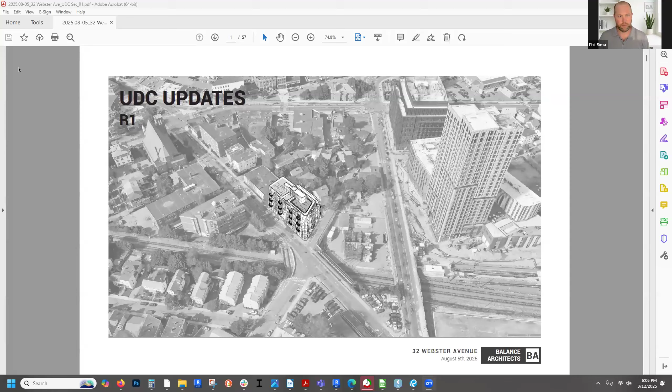Well, thanks everyone. So we got some great feedback from our last meeting, and we came up with some other facade iterations. I'm not going to go through the old options that we had, but I will just kind of land on the last option, which was the one that the UDC asked us to explore. And then we'll go through landscape plans and architectural site plan updates as well.

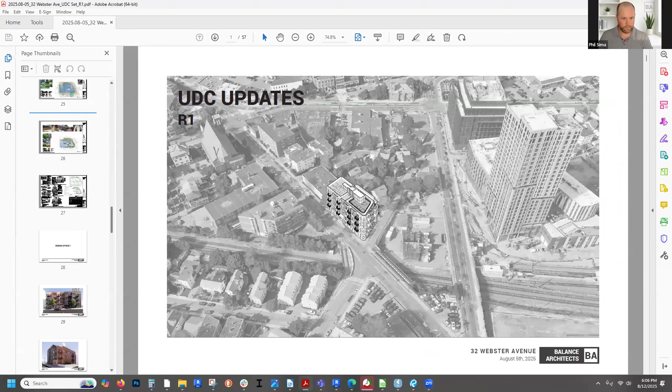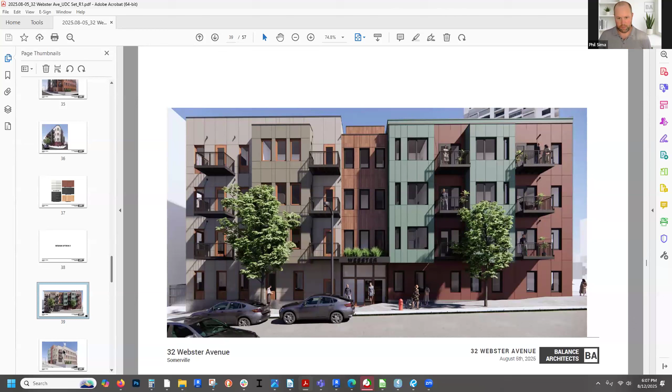So out of our 3 options that we looked at a couple of weeks ago, this was the one that we landed on. It's a mix of fiber cement panels and then a phenolic resin panel in the middle where the entrance on the building is on Webster. Again, it's a very long building, so we're trying to break up the massing of the facade. Generally, we got good feedback with this scheme on Webster. Again, this is facing the rear yard here.

I think there was generally positive feedback, but where we needed some work was this corner of Webster and Newton, and that it just wasn't really doing justice to this really unique geometry on the site where everything's kind of sloping away, and this is coming right into the middle. We felt we should do more to celebrate this facade and make it unique at the corner.

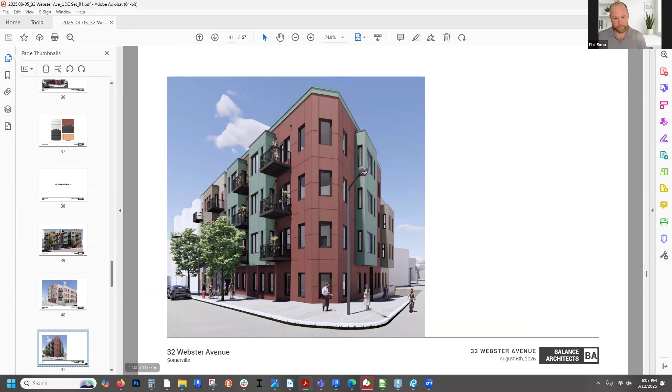So with that in mind, we came up with several design options and iterations of this. The first basically creates balconies on the corner and uses soffitted balconies with angles using that same material to create some really interesting, rugged geometry at the point of this building. You really see it here. So quite a bit different from what we were looking at before, and some really nice outdoor space for those units on the corner.

And then you can see how this looks on the side. Again, it's kind of this nice piercing geometry that accentuates the corner. So that's option one, and I think our favorite from the options.

We came up with another more muted option, but still really celebrates that corner. So what we've done is introduce some Juliet balconies over here. So you can see this from here. It just really pops the fenestration, makes it much more light and bright on that corner.

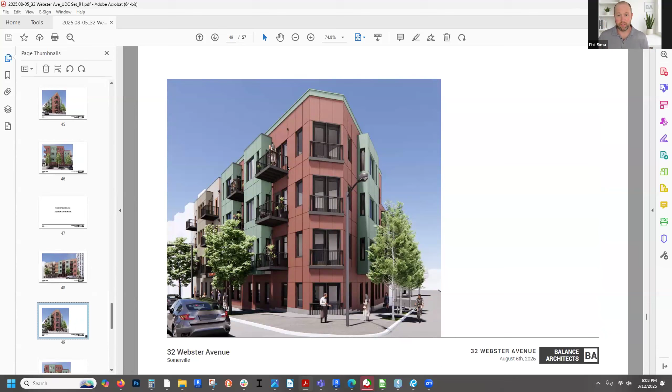And again, add some nice amenity space. They still have full balconies in these units. They also have the ability to really open up onto the street. So that's what we're looking at here as well, kind of that chamfered edge.

And then our third design option really looked at changing the material and fenestration patterns on that corner. So it's varying between this kind of olive color, where the windows are and where this is, and that jogs up and down throughout the entire facade.

And then we've also introduced a stronger cornice up here. That was something that was a comment as well, to kind of give some pronunciation to this edge. You can see what this feels like on the corner as well.

There were some considerations too about this red material and where it ended before it kind of stopped short of the 4-story massing. Now we've taken that and it carries around. This bay is now the same material type as before. It was kind of tan. This tan material was coming along here.

And also looking at fencing, so we have a couple options along here. We've removed the pad-mounted transformer and now making it a manhole transformer, which Michael and myself will talk about in the landscape updates. But looking at a panelized metal facade, I think this is from Parasoleil, versus just a contemporary wooden fence with really long horizontal edges that link back to some of the materials in the building. So those are the fence options and the general treatment of the rear.

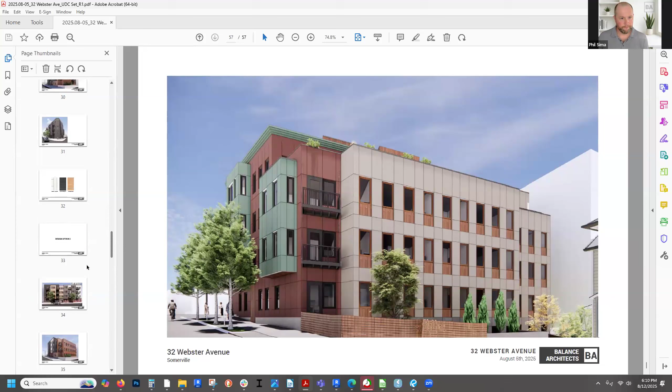Just going to quickly go to the architectural site plan updates, and then we can do landscape updates as well. So the big one was that we were really struggling to get the pad-mounted transformer in there and to screen it, and I know neighbors don't really like that, so that was a big move that we did to make this a manhole transformer.

We had some small vegetation options at the front, really with that 12-foot wide sidewalk setback and the limited green space, plus the harshness of this corner, that just wasn't really a viable option at the end of the day. So architecturally, here we've coordinated more with the landscape, which I'll have Michael review right now.

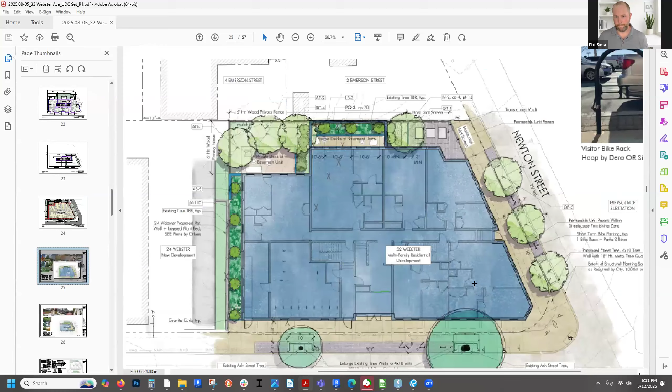Piggybacking off of what Phil said, with our landscape, the two main changes to the site plan were the transformer as well as the plant bed that we had originally at the corner of Webster and Newton Street. We removed that, as Phil mentioned, the setback. And when we're looking at a corner, our main goal is to have it walkable and accessible. It felt like that was getting in the way of both sightlines and walkability.

Moving up to the transformer pad, as Phil mentioned, we had trouble fitting in the pad mounted transformer, so we moved to a transformer vault. Around that, we want to add some permeable paving. Another comment we had received earlier on was that the fence we had originally around it was a little too traditional, so we were looking at some sort of 6-foot height horizontal slat fence or some sort of metal fence from Parasoleil. So those would be the two main changes to the landscape plan.

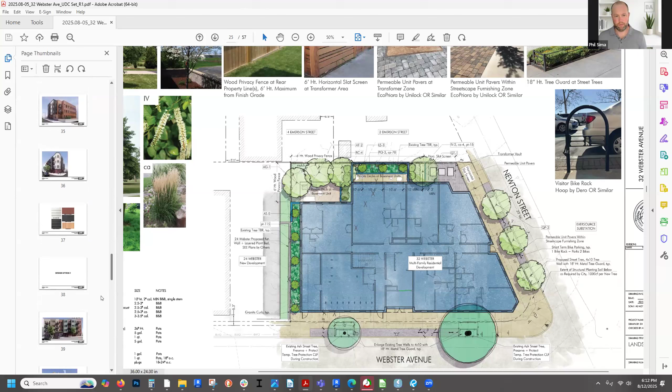And that's pretty much all that we have for the presentation. So I'll just leave it on this last design option and open it up for comments.

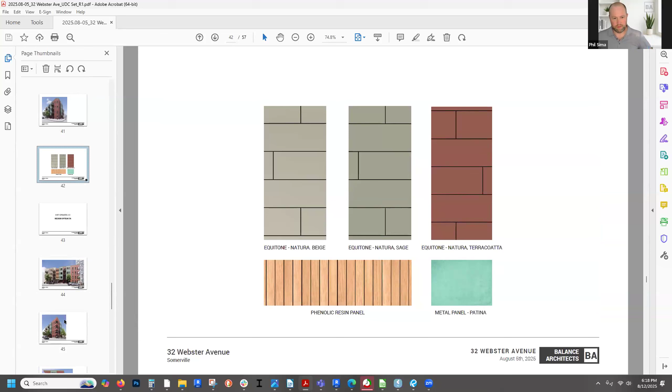Ideally not. Okay, all right, but that's good. Ideally not, no, that's fine. I'm just asking the questions.

I mean, the expression of it really just creates more of a corner. I think people would really want to hang out in a corner, and I think it would be used better than a Juliet balcony. So I really do think this is a good approach to it. I do like the accentuation of the corner by doing this.

Thanks, I agree, I like the architecture of it. There's a dynamic quality to it. It provides a level of interest at that corner, which I think is really nice.

What's happening at the ground floor there? The grade is sloping up towards the corner, and then there's that second floor balcony sticking out. It looks like it's a relatively low clearance under that.

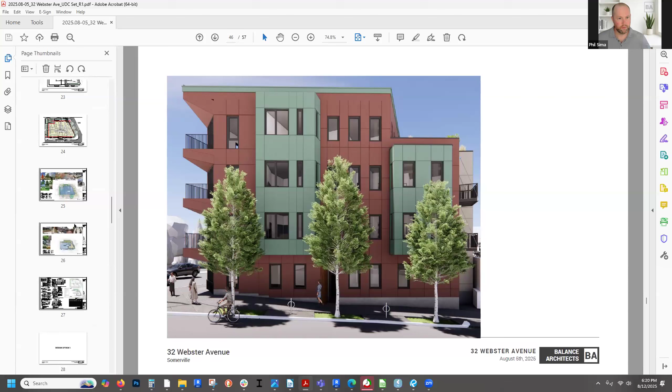Typically Somerville wouldn't allow you to do that when it's over the property line. But we are not over the property line here, all that is within our property. So basically our property is this kind of hatched area, it just extends out to there.

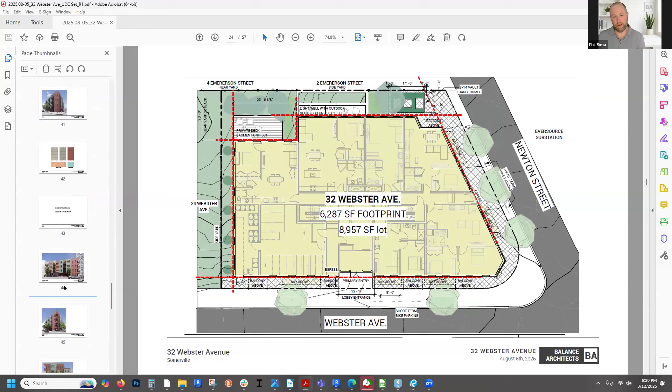We haven't had another conversation with ISD or staff after our last one. We think it's still consistent with the zoning ordinance, but there might come a point when they tell us it has to start from the third floor. But right now, it's all within our property.

So can you walk under that balcony? Does the sidewalk extend underneath the second floor balcony? Yeah, the same paving material, essentially the sidewalk, but it's on our property. And approximately, what's that clearance?

It's pretty low. It looks about 11 feet to the peak or something. I think it looks less. Looks like 6 or 7 to me. Well, this guy, I mean, he's got some feet in the sidewalk, but I don't know.

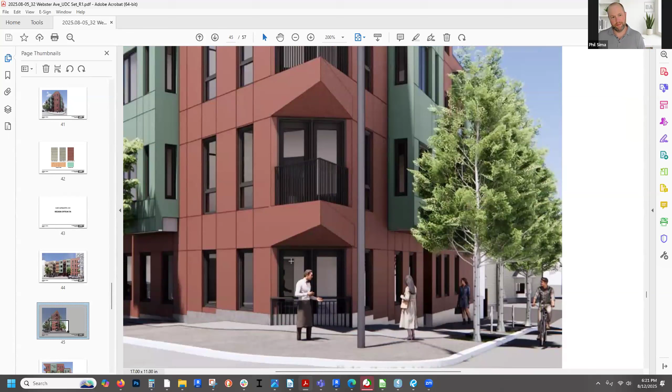I don't have that measurement right now, but I think that'll be something important to confirm. If it's overhanging the public realm, I don't know exactly what the zoning ordinance requires for bays that overhang the property line.

I know code has a requirement for that too. I think it probably wants to be at least, think of the height of someone standing up on a bike or something, right, 9, 10 feet. Yeah, we can confirm that.

I'm not sure, if you did end up losing that because there wasn't proper clearance, I'm not sure it changes the approach. I think it's still dynamic and interesting architecture, even without the second floor balcony.

It seems like you have a lot of meat there, perhaps, Tim, and maybe it doesn't need to be the Angry Birds kind of beak on that floor. Maybe it changes the aesthetic, but you could still have potentially a balcony without all of that dead space inside. I know what you're trying to achieve, but it's nice to have the consistency, so maybe there's the idea of exploring it a little different so you still maintain that.

Or maybe that outer edge gets even thinner, where it comes to a point, once you get into real structural design.

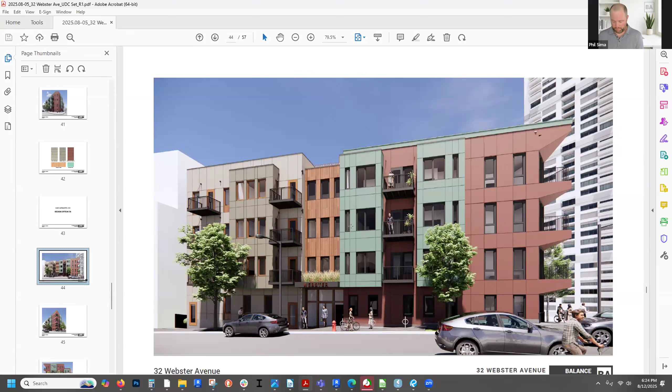So I agree with my colleagues about, and you, Phil, about the preferred. I think there's no corner like that in Somerville, as far as I know, so it has a unique identity.

I wonder, so the ground floor of that corner is residential, correct? Oh yeah, whole building is residential. I'm wondering if it's not treated differently in terms of the fence, which right now is also sinking in the concrete, and maybe that one is not a door, that feels like a vulnerable place for a door.

I don't know, it might be the only unit that does have an exterior entry. Is that true? Are there other ground floor units that have one? It just feels like too prominent a corner to have a door there going into a unit. So I feel like maybe there's another landscape solution. You do have to keep people from hitting their head, but maybe there's something else that defines that corner, keeps people off of it, gives that unit some protection. But it's not the same thing you have on the upper floors.

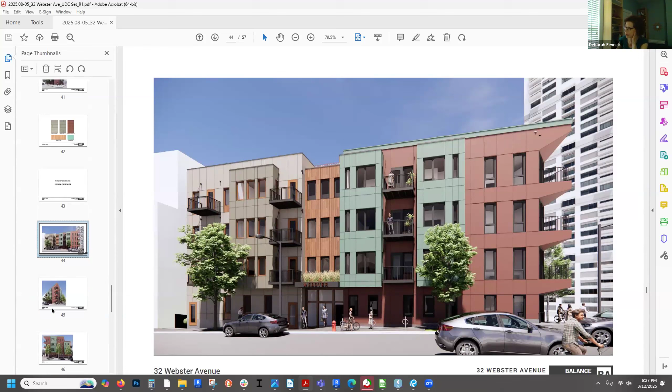There's a condition kind of kitty corner to this site, a building built probably 8 or 9 years ago, that has a condition where the street slopes up to the corner. There are windows that get very short, into a retail space, and it's kind of weird on the corner because they have such a small, diminutive scale at the ground floor while all the upper floor windows are bigger. I guess there's the possibility of that happening here as well, because it looks like the windows at the ground level are smaller than the upper floor windows- yeah, on the corner they are.

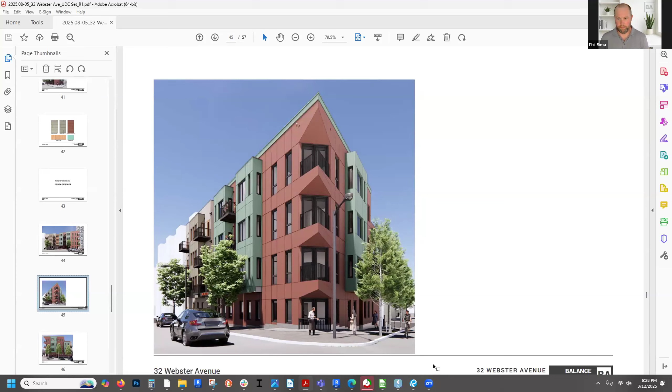Great, any other comments before we move to a vote?

So it sounds to me like we're ready to at least vote on the first option and approve the facade. Next would be the design guidelines for the MR4 district, and then last is the additional design guidance to these recommendations we've been talking about.

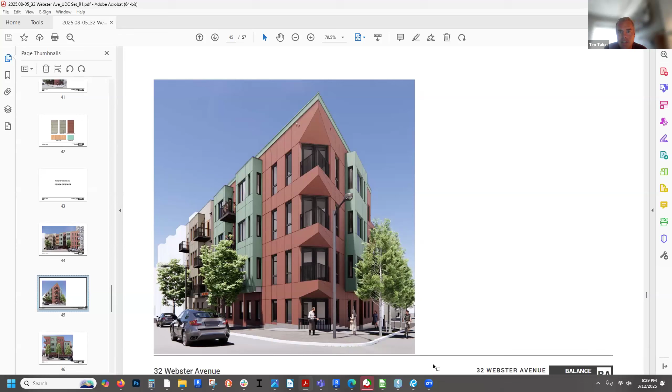I've just got two more comments. One, it looks in this image like the fiber cement panels aren't coming all the way down to the sidewalk, that there's some type of water table there, a stone base or something like that- is that correct? Correct, yeah.

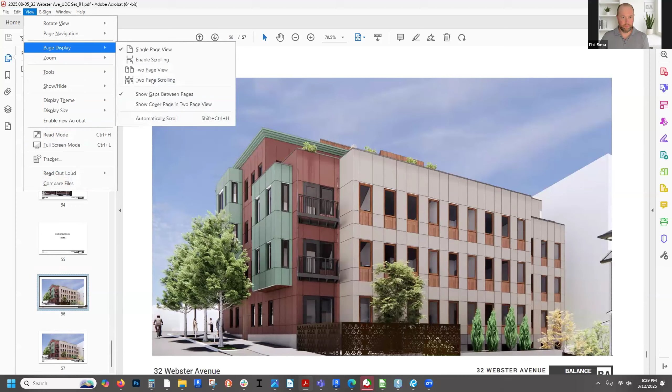And then also just the fence options that you showed- if we can go to that, let me see if I can do side by side. Not really, but good enough.

So I guess with the transformer going underground into a vault, does the fence still need to be 6 feet tall? No, actually you could. I'm thinking about the perceived height of that next to the adjacent property as the street slopes away. I'm wondering what that actual change in height from the top of the fence to that property is, and maybe there's a way to bring the fence down and have it be a little more diminutive.

Yeah, certainly. I mean, we could definitely do it to the first floor kind of foundation too. That would be a nice datum point and lower it. Looks like 18 inches or so.

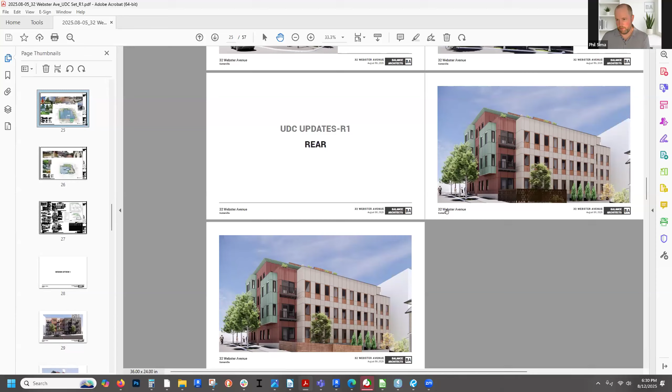Yeah, I guess what actually is it enclosing then? Is it just landscaping? Yeah, it's just a fence to kind of keep people from going into there. That's it. It comes straight off the building here.

And those pavers, are those at a different elevation than sidewalk level? They're at just about the same elevation as sidewalk level. I know that the transformer needs to be at a level height, so they'll slope a little bit with the sidewalk until they're at the transformer.

Yeah, it would be nice, I don't know what the solution is here, but maybe this is an area that the landscape design could be studied a little more, because it feels a bit like a lost space if it's just fenced off and inaccessible.

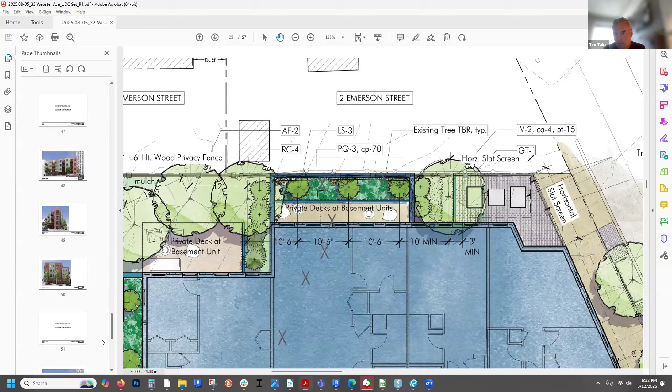And any more comments from the commission? Doesn't look like it. So it seems like we are ready to vote on the facade, and it seems like the commission was leaning towards the first option. So can I get a motion to approve option A, that creates the sort of corners of the building?

So moved. Second. Thank you. Motion by Deborah, second by Frank, and now a roll call vote. Deborah, yes. Tim, yes. Frank, yes. And Martin, yes. Great, the motion passes.

And next we will vote on design guidelines, that those have been met for the MR4 district. Can I get a motion for this? Motion. Thank you, Frank. And a second. Second. Thank you, Martin. And now a roll call vote. Deborah, yes. Tim, yes. Frank, yes. Martin, yes. Great, and so this motion also passes.

And last but not least is the motion for additional design guidance to the recommendations, which includes: one, confirming the feasibility of an above ground transformer and confirming that with Eversource; feasibility of a below ground manhole transformer; and then reviewing and confirming the height of the overhanging bays, the treatment color of the cornice, defining the ground unit, and lastly defining the fence options and that space around the transformer.

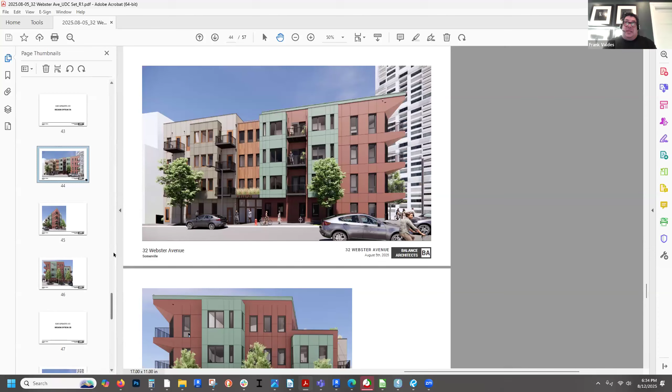I would add providing an alternate to the transformer being above ground in case a manhole is rejected by Eversource. So it would be good to have that to look at. Great, by alternate, are you suggesting an indoor vault? Just working out what that would mean for the building. Right, I mean we would need to know what the option would be if Eversource at some point says no, we don't want a manhole. What would be the alternate? So it's either outside somewhere, like it was presented before.

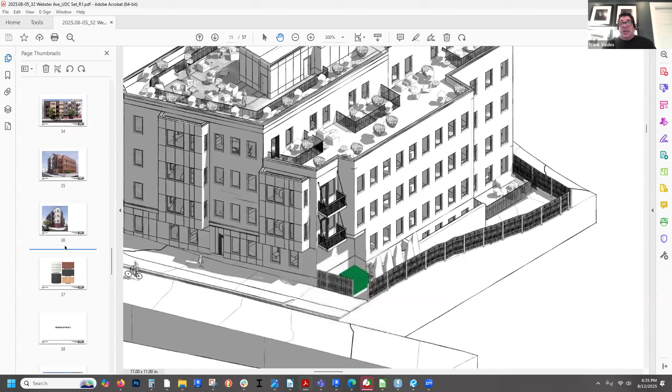I don't think that you can put it in, but you could do an alcove or a vault. But I think there needs to be, we need to see an alternative, right Tim? Not just, oh I don't know what happened, this is where I put it. Yeah, unless there is confirmation from Eversource that they're comfortable with it. Yes, agree. But that needs to just, that makes sense. And I'd say, either an acceptable outdoor alternative or...

What we're saying, I think, is that we are approving a manhole transformer, and if that does not get approved by Eversource, we would like to review the option as to where it's being put. Great, does that sound fair, Tim? Yeah, I think so. All right, and quick question.

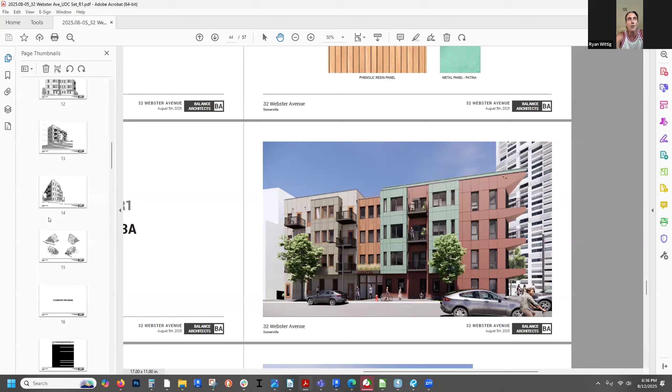Hi, this is Ryan Wittig, I'm representing the ownership group. We had previously presented the pad mounted transformer in our first presentation. Phil might have that, so we can revert back to show it was in our first round of design proposals. The reason we put it as an underground manhole transformer was in response to community - I don't want to say demands, but strong requests - so we were trying to cater to the feedback we got from JT Scott and some of the neighbors. And now obviously we hear your concerns, and we voiced those concerns as well originally. So I don't know if Phil has the original proposal we first presented. That wouldn't change, so we can show that now.

No, I think we appreciate the effort that you went through to locate it below grade, and the desire to do that. That is a better solution for sure.

I think what Frank's voicing is a concern that if it turns out that's simply not feasible, is there a third alternative that hasn't been explored yet? Either modifications to the building design to address the neighborhood's concerns about proximity of the transformer to the public realm and neighbors, or putting it in an indoor vault, as is relatively typical.

If you're familiar with the Union Square project around Bow Street going into the market basket, we approved a particular area for the transformer, and then it was moved in front of the building because of a request from Eversource, which wasn't what we approved. Nobody said anything, and then everybody's screaming about it. So it's about creating more open communication with Eversource on what's acceptable, so everybody's happy with it, because that's why the community's probably screaming at seeing it on the outside.

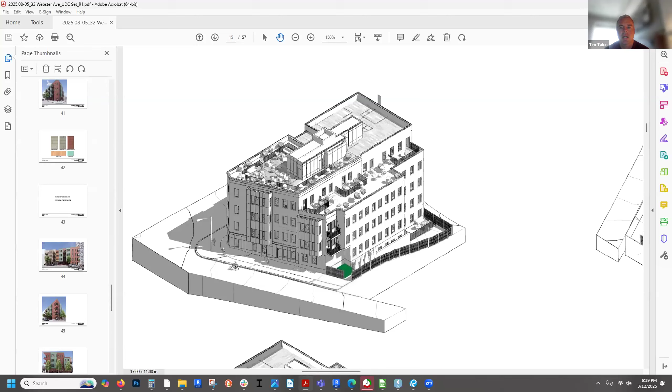No, correct, I think the request isn't to come back to us with that. It's that your next step is another neighborhood meeting and then planning board, to go to the planning board with an update on conversations. We can do that, continue going through the process.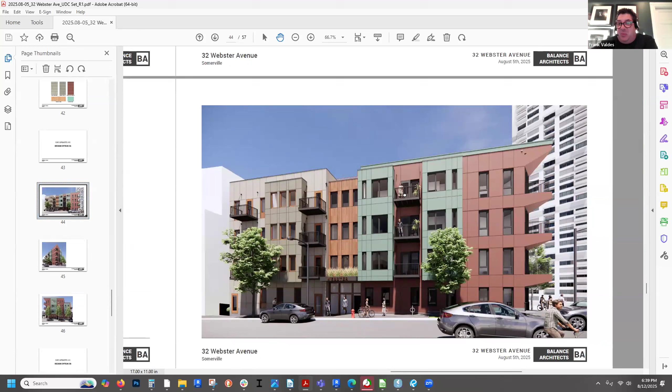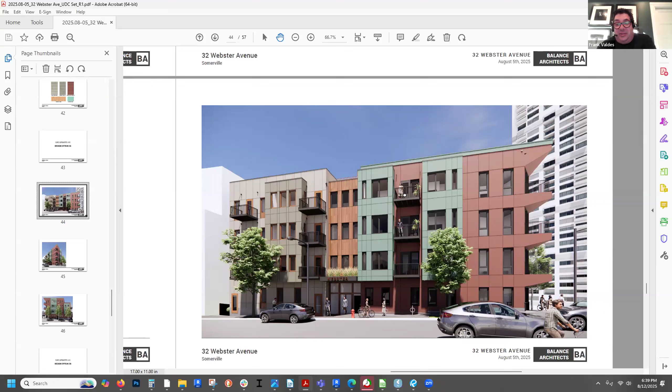We're saying we accept what you have. There's a condition, but the condition doesn't stop you from continuing. Continue, schedule a meeting, have a discussion, ask them: is this going to be allowed? And as you go through the process, if they say no, this is not acceptable, then you say, alright, at this point let me talk to the planning board. And then we have the options that you presented. That's all we're saying.

Continue. Perfect. Okay, thank you. Thank you, appreciate that.

Okay, so I'm going to go through what the motion is going to be. First, to confirm the feasibility of a below ground transformer with Eversource, and if it is not accepted, the UDC will want to see an alternate for an above ground transformer option, which should not hold up the process for following meetings.

Second, to review and confirm the height of overhanging bays. Third, look at the color and treatment of the cornice. Fourth, to define and differentiate the treatment of the ground floor along the street as well as at that corner. And last, look at the fence options and understand that fence condition if it is still to contain that transformer area, looking at landscape options and understanding the condition of the fence and how it meets the ground, and potentially lower the fence.

Great. So can I have a motion for all of those things? So moved. Thank you, Tim. And seconded by Frank. So we will move to a roll call vote.

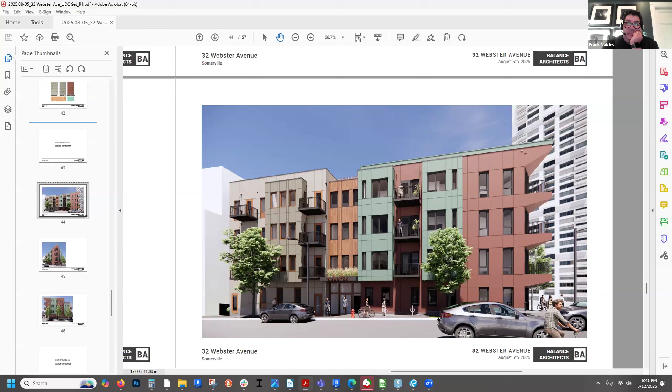Deborah? You're muted, but... yes, sorry, great. Tim, yes. Frank, yes. And Martin, yes. Great, so this motion passes.

So first off, we have our site plan. Well, I guess I should confirm, is everyone seeing my screen? Okay.

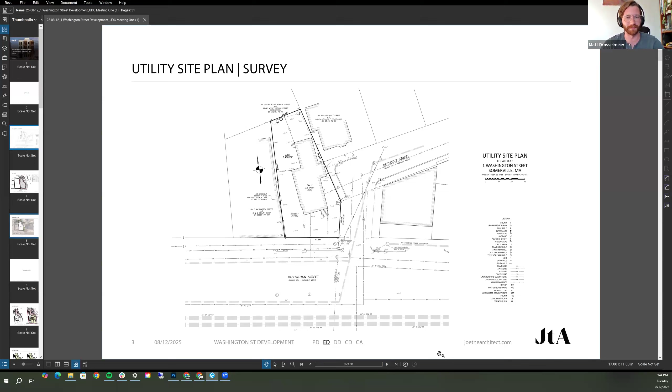So first off, we have our site plan or our survey. 1 Washington Street is approximately a 3,400 square foot lot zoned in the MR4 district, abutting NR districts on the north and east of the site. Our goal for this project was to build everything by right with no special variances, and the two things I mentioned earlier largely drive the dimensional requirements and setbacks of the building. So we have a 12-foot curb setback around Washington Street and Crescent Street, and a 30-foot top floor setback where we abut the NR districts at the north and east of the lot.

That would be 6 Crescent Street and 88 Mount Vernon Street. Most of the area directly abutting those lots will be landscaped and hardscaped to create buffers between the buildings and allow for some outdoor space on the site, which you'll see here on the next slide.

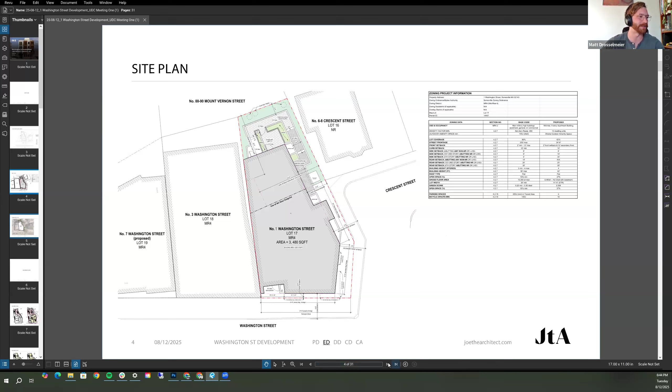In addition to creating a new 10-unit multifamily building, we want to improve the character of the street, allow for additional greenery and outdoor space, improve the existing curb cut along Crescent Street, and create a better intersection at Washington Street. As I mentioned, we had our neighborhood meeting about a month back, and the intersection at Washington Street and Crescent Street, which is this one right here, was a big topic of concern. So we certainly want to make sure we improve that junction.

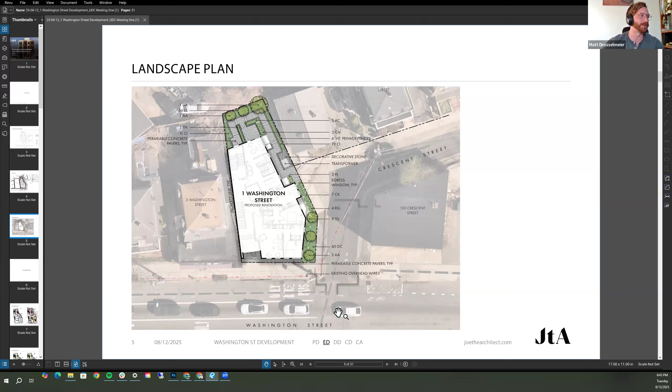Moving on to the building plans. As I mentioned, we don't want to seek any variance for the proposed development, so the building will stay within the 4-story and under 50-foot height requirement by zoning code.

The basement will be where building services are provided, like the trash room, unit storage, bike storage, and utility, as well as provide 2 additional bedrooms for the ground floor duplex unit at the rear of the building.

The ground floor will have another 2 one-bedroom units with space for mail and packaging at the front and a small common area. The entry will be slightly set back to allow some buffer from the curb and provide a little shade at the entrance as well.

Second floor will have a mix of 1 bedrooms and 2 bedrooms, with the larger 2-bedroom positioned at the front of the building to allow for views to the street, and the 1 bedrooms having balconies off Crescent Street.

On the 3rd floor, those 1 bedrooms stack with the bottom of the two duplex units located at the front.

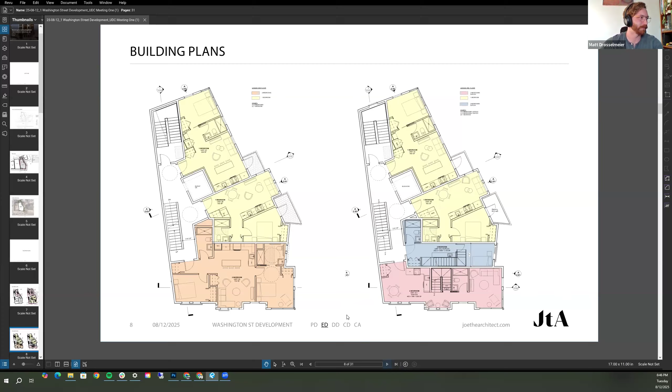And then finally in our plan, the top floor contains the remainder of the duplex units on the floor below, with a public patio at the back of the site here, to have some additional outdoor space for the residents, and maintaining that top floor setback I mentioned earlier. Finally, the roof immediately above the duplexes will be private patios for those residents.

So that brings our unit mix to a total of 10 units: 1 3-bedroom duplex, 2 2-bedroom duplexes, 1 traditional 2-bedroom, and 6 1-bedrooms.

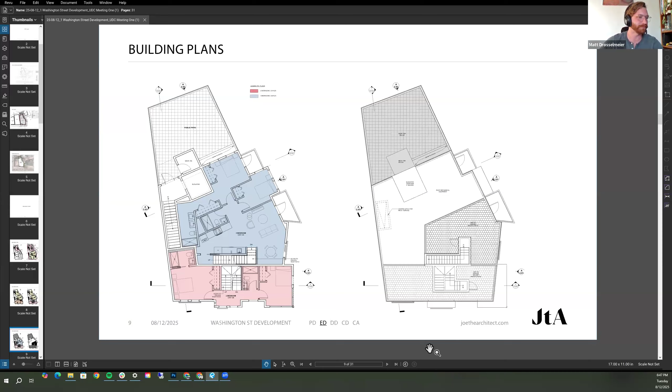We have 3 options for exterior elevations using different materiality and cladding, but fenestration remains consistent throughout. Option 1 at the ground floor will use a traditional red brick, which keeps with the character of Boston, Cambridge, and Somerville, and grounds the building in a nice way, while the top floor is mostly designed with a light hardy panel. We'll use wood panel siding at the bay window bump-outs to provide some accent to the building and break up the large masses as you round the corner of Crescent Street.

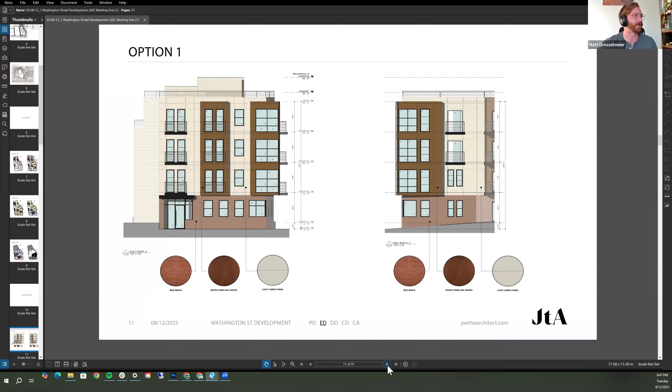Our side elevation will match the hardy paneling throughout, but given that this is the location of our core, and we don't yet know what may come of the property adjacent to us at 3 Washington Street, there are no openings on this elevation.

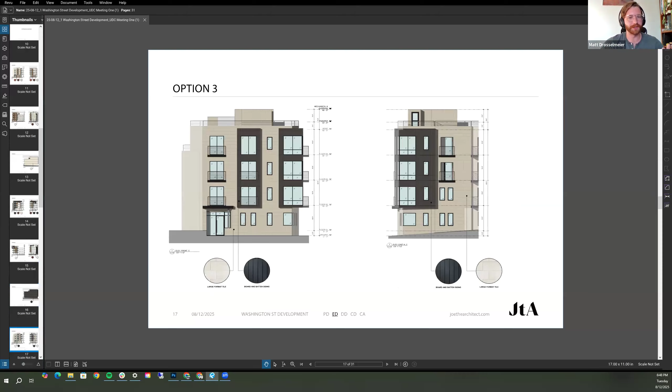These are the side elevations. Finally, option 3, we explored using a large format tile throughout, so it's a little more monotone in this option, and then black board and batten comes back and serves as the accent to the building that the wood was providing in the previous schemes.

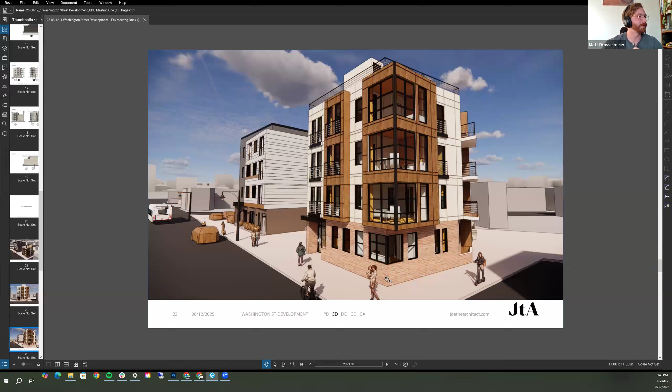Side elevations, and then finally our exterior elevations, our 3D renderings, which show the building from different viewpoints in context with 7 Washington Street, a project that Joe the architect underwent the entitlement process for just a few years back. So we have the view from across Washington Street, and this is the view from the corner of Crescent and Washington Street.

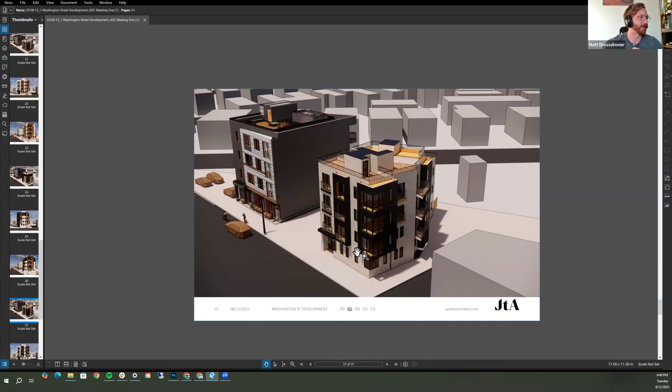Option 2 is your axon view. You'll see that band providing a connection around Crescent Street. View from the corner. And then option 3 is your large format tile with those dark board and batten accents replacing the wood.

Last but not least, we have our exploration of how the sun will be hitting the building throughout the year, which shows that most of the shadows are cast across Crescent Street. Given our top floor setback from the NR districts at the rear and right of the site, it shows that the shadows are not too dissimilar from the building that's existing there.

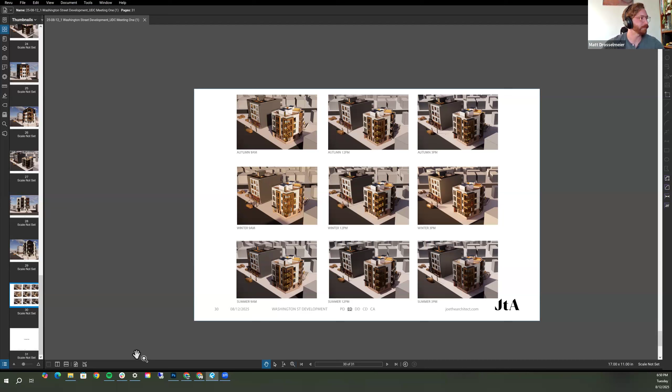That's all I have for today. Thank you very much for your time, and I'll open it up to comments.

Can I ask a question to begin with? Do you have a preferred option? Yeah, our preferred option would be option 1, which is the one I'm showing here on the screen. Okay, thank you.

What is the mechanical system you're using, Matt? So we'd likely do mini split systems throughout for the units. We haven't fully dived into that yet in terms of the overall building systems, but that's kind of our idea. And then obviously everything would be electrical.

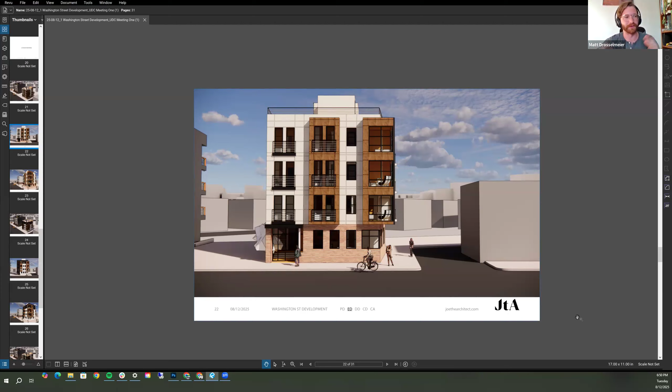And so where would everything exist? The fan coil units would be on the roof? Yes, so we do have a space. Let me go back to my roof plan. We do have a space designated back here adjacent to those duplex private patios that will allocate for the rooftop mechanical.

And are there washers and dryers in the units? Yes. How are you exhausting them? We would propose to do ventless. Is there anything being vented, side vented on the walls?

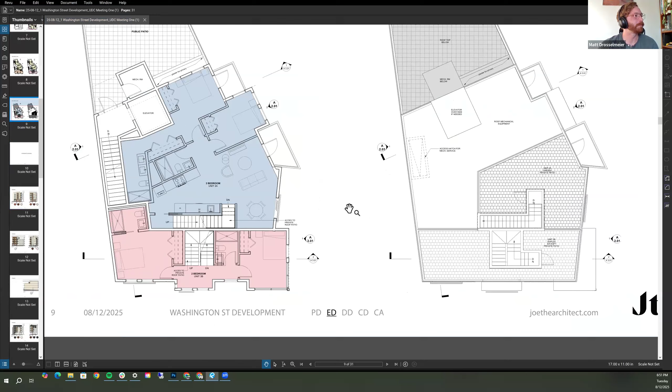How are the bathrooms and the kitchens being vented? That is a good point. The bathroom vents will need to be allocated on the facade as shown here, and obviously kept away from the operable portions of the windows. We don't have those shown yet here, but that's something we can certainly do for the next meeting to delineate where those are. I would say that's definitely something you should look for next time, where these vents are being located and what they look like, and to make sure we explore that. I think that would be key.

Absolutely. Okay. Another question I had pertaining to materiality, when you say wood paneling siding, can you tell me more about what the wood paneling is? So I think we'd probably use a wood-look paneling, not true wood. Would that be like a Nichiha? We haven't specifically determined exactly what that is, but I would say something like that.

So I would ask for clarification on that as well, what it is. I would hate for actual real wood to be used in those areas. I've been seeing some of that deteriorating badly, and I would like to see what the option of the wood-like paneling is, whether it's a Nichiha or whatever other product you're proposing. That would be important to understand as well. Understood. Yeah, totally not true wood, but we'll determine the specifics of it for sure.

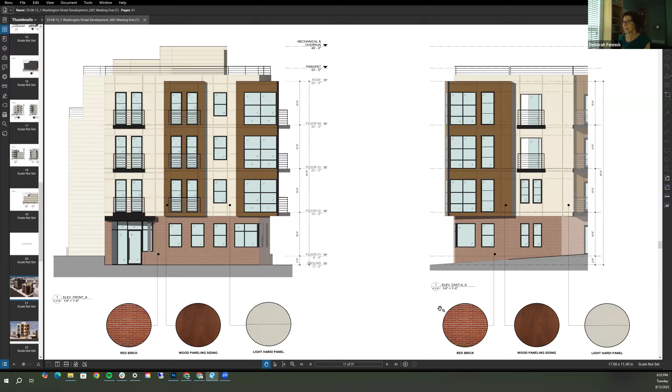I'm suspicious that number one is the strongest approach of the three, but just not being able to see this the way people see it, and not knowing what the context really is. I don't know if that's required, but I thought that was required for our submissions. I wish I knew how this fits into this corner, and what corner this actually is, and whether Crescent is one way or two ways. Where's the larger context, where are most people walking, where's transit and bus stops, all that stuff. I feel like that really enhances the conversation we could have.

Is this like by Tulum? It's right next to Tulum. I was about to say that, Frank. So between these two buildings is Tulum, the Mexican restaurant. Correct, okay, yeah, that's exactly right.

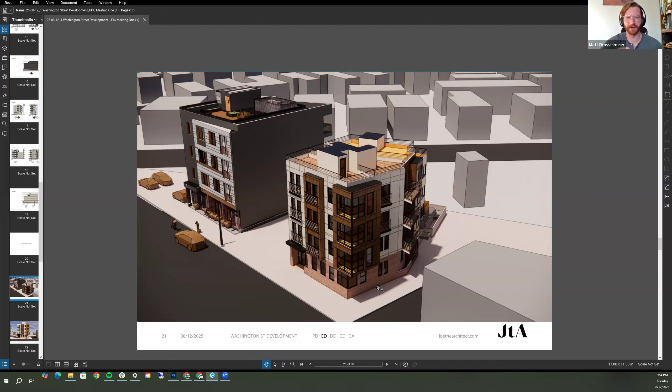If it helps, we can zoom out a little bit in this view so we see more of the context of the city, but also we can put together a plan that zooms out and shows exactly where we're located in terms of train stops and bus locations and things like that.

I guess what made me realize this is I don't quite know what that side elevation is like, how much of it is exposed. Maybe if you pulled out of this view we'd see that it's completely exposed, but I actually don't remember that.

I do have this pulled up, but context - oh no, there is a building on Crescent Street right adjacent to it. Yeah, but it's not shown in your model. How's this experience? We're all architects, so we can imagine better than most people. Yeah, but I think you need to add Tulum.

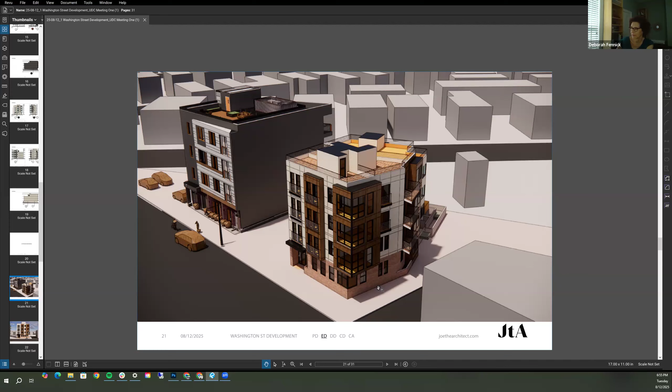Yeah. But my suspicion is that this first scheme is the strongest one. Okay, understood. Yeah, I'd lean in the same direction towards the first option.

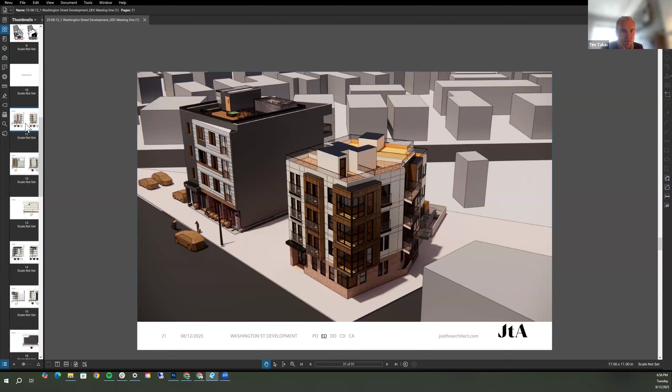I think understanding the specific products you're proposing will be important, kind of like the last presentation where they said specifically we're using Equitone. There's probably multiple different types of products you could use, but just a range of specific options would be helpful. Just looking at the elevations, one thing that jumped out at me - I'm curious about your approach to fenestration and window openings. It seems like there's a number of different proportions and sizes of window openings, some that almost look double hung, some more casement-like, and then an industrial type of window at the corner.

Yeah, so as far as the industrial look, that was just kind of opening up that corner and activating it as much as we possibly could. And then we tried to keep consistent where we have the taller windows at the bump outs, the wood-like bump outs, just to mimic that, and then the smaller punched openings where the building is set back. That was our approach.

I think that probably makes sense in terms of the internal layouts and proximity relationship to context. I think overall it maybe results in a composition that could feel a little more unified, and maybe that's just revisiting how all of these parts and pieces hang together as one unified composition. Is it adjusting the proportion of some of the pieces? Especially the industrial proportion piece next to the double hung proportion piece feels a little off. But maybe there's a way to aggregate your individual punched units to create the larger expanses of glass you're looking for. It's not a huge building, it's a relatively small building, so it feels like it all wants to hang together.

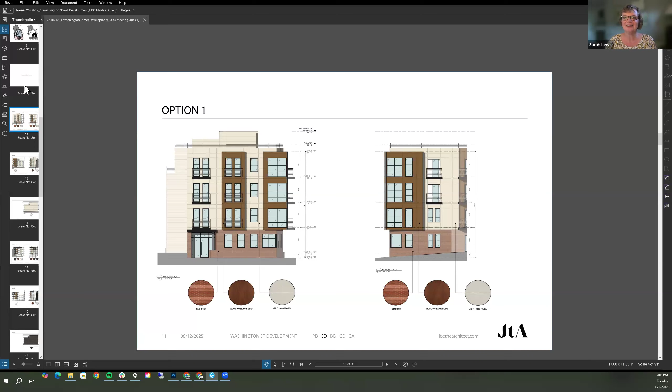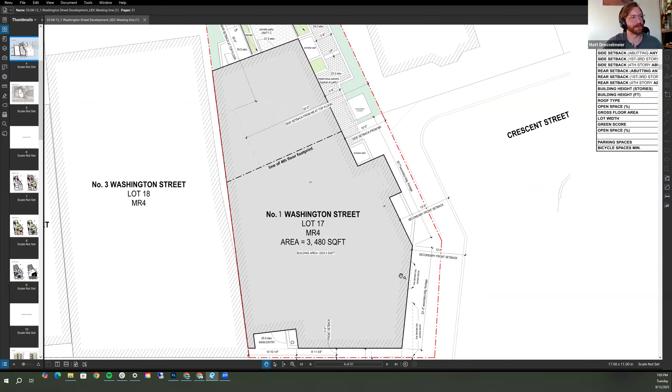I was going to put my Andrew hat on for a hot second since we're all architects right now - could you show us the site plan again, and let's have a quick conversation about transformer locations. Right now our transformer location is at the corner of Crescent. It has to be accessible, so we wanted to locate it as close to Crescent Street as possible but didn't want to sacrifice too much building space. It's positioned right here in this white square.

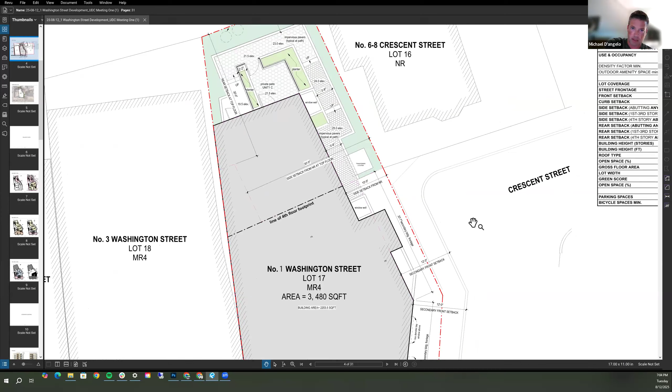Is it framed or screened by anything? Yeah, it would be on a transformer pad and screened with some kind of wood fence around it. On the landscape plan it shows there's a fence that goes around the back portion of the property - it's a double line. Oh, I see, okay.

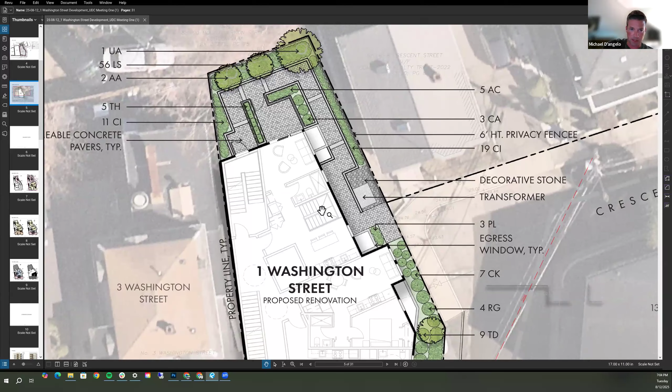But it's screening the transformer from the proposed building, not the neighbor. The Crescent Street building right next to it gets a lot of transformer view, but if you zoom in, the fence comes all the way down to the front, so you can see the double line. We can't put it any further down because we need to maintain access for the site.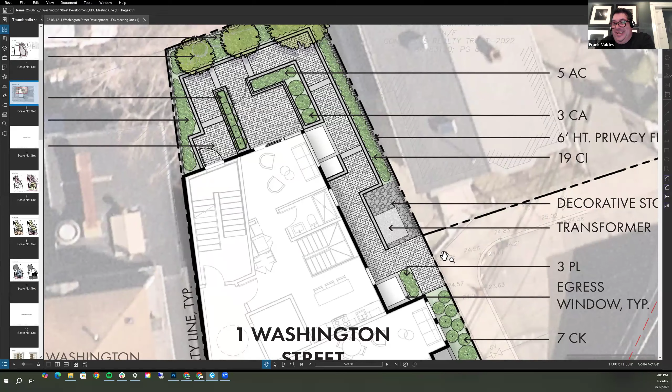Okay, so commission, are we going to let Michael D'Angelo speak at all? I'm just here to answer questions, but I can tell you. Michael, I don't often see you, so I want to hear what you've got to say. Nice to see you, Frank.

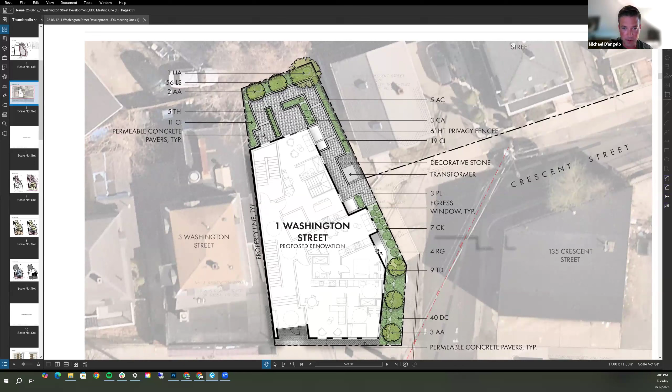As Matt said, the trees in the back were existing, but they're tree of heaven, and they're pretty nasty, so they're coming out. We have some new flowering trees going in. The AA are Amelanchiers, the UA is an elm, more of an upright species, so it won't grow into that house. In the front we have a few multi-stem Amelanchiers that will sit right underneath that protrusion of the building, and below that, tough, tolerant plant material that should do well along that sidewalk condition.

If you look at Street View, the roadway kind of just comes right into where the proposed building is. So we're proposing continuing the sidewalk — you'll see that double line there where it says 40 DC — which is good, because right now it's like a flush situation right from the road into the building. So the sidewalk will continue, and we're also closing off a curb cut along the main road.

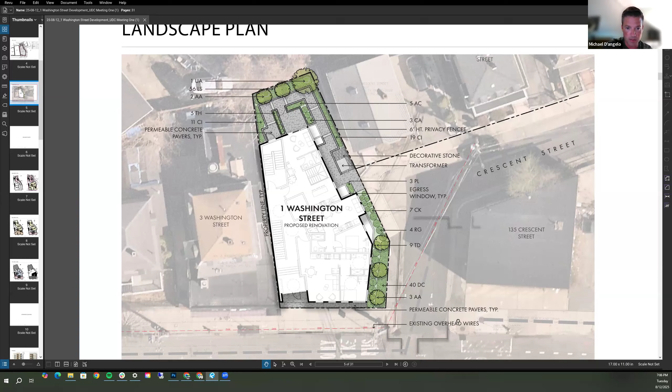If you see the double line on Washington, there's an existing curb cut to the left in front — that's getting closed off. We're not adding street trees because there are some utilities and overhead wires right there.

Should we take a motion to continue the project? I was going to see if you wanted to at least take a motion on the facade now. I think everybody agreed that option 1, correct? Correct, I think we're leaning towards that. I'd ask Deborah if she's comfortable with that.

You brought up the comment about the site plan. I am, but it would be great at the next meeting to have a better understanding of how this fits in the context and how people will experience it. Okay, then let's not take a vote on that, and we'll take a vote for continuance, knowing everybody is leaning toward option 1, so that at least helps the team move forward with their explorations. So can I get a motion to continue 1 Washington to our next meeting?